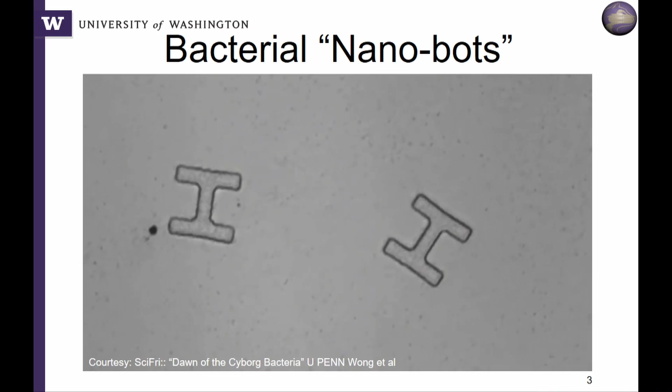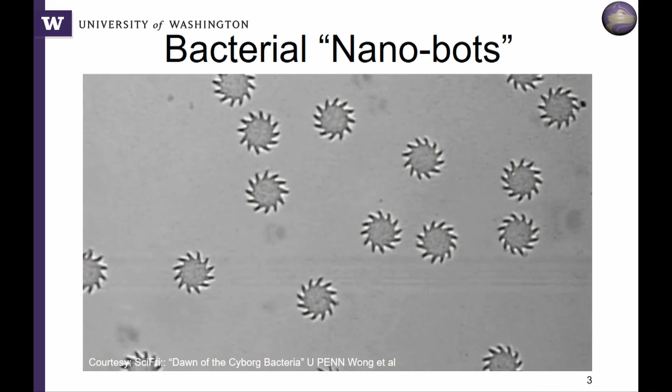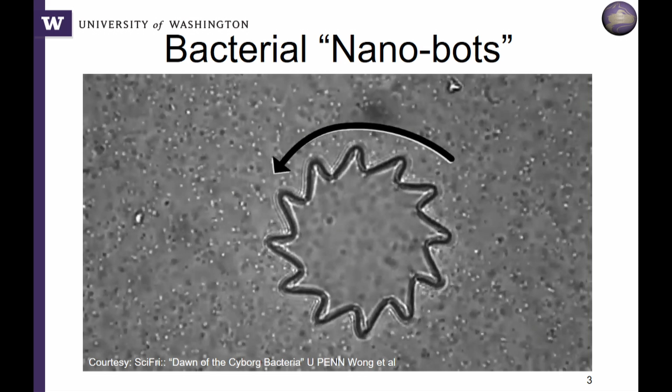We've also had a promise of some nanites or microbots. And in this case, the closest I could find is swarming bacteria. And these swarming bacteria right now are moving these photolithographically defined polymers. And this is work coming out of the University of Pennsylvania, where they're able to program or control or provide stimuli to these swarming bacteria to help motorize these nano devices. So that's about as close as we get to nanites today.

But it's a good theme for this evening because what I'm going to be really focusing on is the fact that we're seeing an integration of bio devices, bio interfaces, and traditional electronics. And I really think that's a theme that will continue to grow as time evolves.

So one of the challenges I have as a nanotechnology director is a lot of people will ask, what do you do? They come up to me and they're like, so what do you do? And I say, well, I'm director of a nanofabrication lab, and I usually get a blank stare if they're not in my field. And the answer is really complex because nanotechnology is a wide range of different technologies. Nanofabrication, of course, is my background, so traditional IC manufacturing or integrated circuits, advanced packaging, a lot of material science that goes into that.

My talk will be mainly focused on that, but we also delve into molecular biology, so understanding cell functions, components of cells, how they integrate and work. So we'll have some talks that will be covering that.

Surface science really is the analysis of what happens between two phases, whether it's physical or chemical. So monitoring atomic impurities on the surface, looking at AFMs, so atomic force microscopy, looking at surface roughness at the atomic scale. That's that type of research.

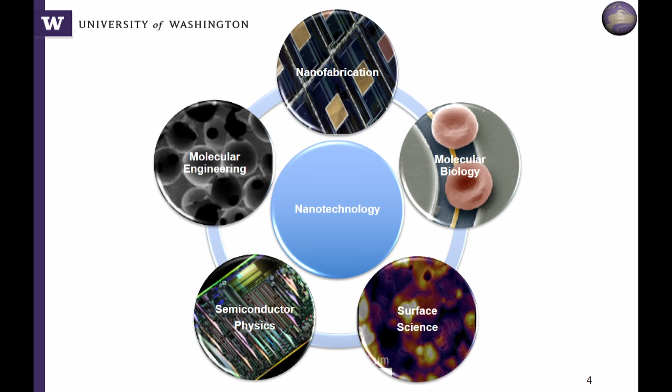Semiconductor physics, things like traditional control of conductivity, photonics, electrophotonic interactions, quantum physics. So these are areas of study that are in the state of the art of the work that we do. And then molecular engineering, where we're actually designing designer molecules to improve materials, improve surface science, to mimic biology.

So all these are really nanoscale, so something between 1 nanometer or sub-nanometer up to 100 nanometers really is the definition of nanotechnology, and either observing that material or manipulating it for some purpose. So that's what we're going to be focusing on. We'll be bridging between those different technologies tonight.

So I'm going to step back and kind of look at what is the technical revolution that's next. Historically, in the last few decades, we've had a major revolution per decade. So in the 80s, we had a PC revolution. The mainframes got onto people's desktops, people embraced it, and it fundamentally changed the way we work.

The internet revolution, of course, in the 1990s, we started connecting at a much higher level, and it revolutionized and changed the way people interact, the way communications and information is assimilated and also communicated. And then, of course, the mobile revolution in the 2000s, where we now ended up with these devices where we have that connectivity. Now, none of them actually replaced each other, right?

So these technical revolutions, if you look at what a technological revolution is, the formal definition says that it's a new set of technology that replaces a former set of technology. And I have to say with the PC, with these information technology revolutions, they really build on each other. And so they're more evolutionary versus revolutionary, but they do fundamentally change how we work.

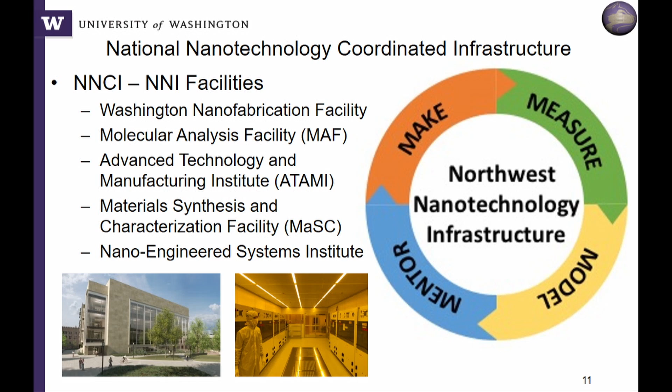Okay, part of our methodology, I'm obviously part of the MAKE group, but our mantra is to make, measure, model, and then also mentor. And so part of the workshop here, we have several of our students in the audience, and that's part of our mentorship, is to work on developing new engineers and technicians that work in the nanosciences so that the local workforce has a pool to draw from when they need those folks.

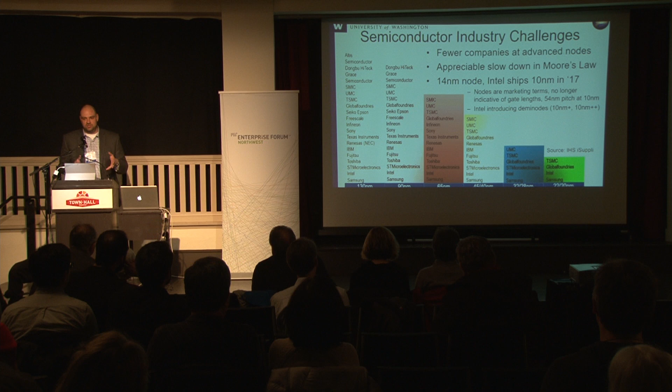Okay, diving into where we are as an industry. So the semiconductor industry has been facing some challenges lately. We have fewer and fewer companies that are at the advanced technology nodes. Right now, state of the art in production is 14 nanometer devices, and we're calling it a 14 nanometer node.

And just as a sidebar, the marketing guys have jumped onto these nodes, and the nodes no longer have a resemblance to the actual physicality of what's happening on the chip. So back in the old days, when I started in this industry, it was 97. I'm dating myself, but I was right out of high school, so I'm not ancient yet. But basically, back then, the node meant what the size of our minimum gate length was. So it was the size of a transistor gate.

And when the marketing guys took over, they just got onto these nodes based on how small they could actually print a feature, whether it had any semblance to what's happening on the transistor or not. And so it really doesn't mean the same thing. So if Samsung says they're shipping 10 nanometer, which is what they're claiming, they're going to get 10 nanometer chips out this quarter, and Intel's saying they're going to get 10 nanometer chips out in 2017, doesn't really mean that your gate length is 10 nanometers. In fact, the transistor pitch is still somewhere around the 50 nanometer mark, 54 nanometers.

So that's point number one I want to make, is even though they're saying that, on this chart it kind of peters out at 20 nanometers, they're not quite apples to apples comparisons between these companies. The other part that I want to point out is it's getting harder and harder to sustain what was called Moore's Law. Moore's Law was not an actual law, but it was more of an observation by Gordon Moore, who was one of the co-founders of Intel, that we'd be doubling the transistor density roughly every year and a half to 2 years. So every 18 to 24 months, we'd double that.

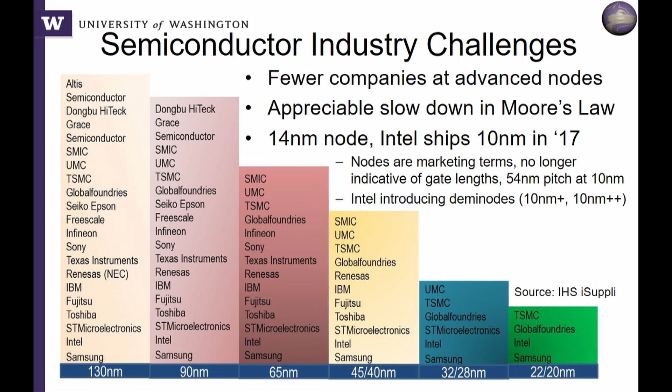But Intel right now is the forefront still. Even though everybody's saying they're shipping 10 nanometer, they're probably the most advanced and the most stable in the process control. They're also looking at diversifying, right? So they're seeing the fact that the demand for chips and processors is starting to wane. So they're now opening their facilities up to foundry work. So they're actually going to be taking designs and be a production for hire, just like Taiwan Semiconductor has been doing.

So the focus is the industry is changing. There are advantages in power consumption, but not really in speed at that size. The transistor density is definitely a factor there. And as we get more parallel processing on chip, that's still an advantage that those forefront leaders are carrying.

Intel's kind of given up the fact that they're going to pursue the next node. So 10 nanometers, like I said, this year. The next node is 7 nanometer, but they're going to be introducing these demi nodes where they're going to try to extend the functionality and better performance without really shrinking the transistors any further. So they're introducing 10 nanometer plus and 10 nanometer plus plus. And again, I think it's more of a marketing thing. So the reality is it's getting a little sparse in the forefront.

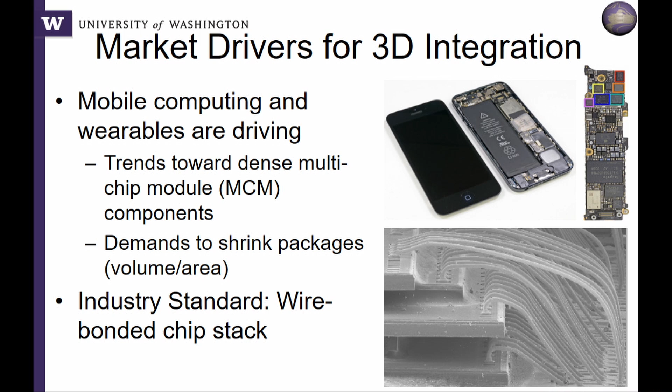And it works really well in mobile computing, but it's not enough. We keep adding the functionality. We add more chips to that chipset. And so we've done things like now embed the chips. We've consumed the front and back of the circuit board. And so we've run out of real estate on that main board in your phone. And so now we're looking at embedded chips and passive devices in the inside of the printed circuit board.

Now, you're going to put your highest reliability chips in the inside of the board because once you sandwich that together, you can't rework it. So if your chips on the inside are bad, you have to throw the whole module away, and that's a huge waste. So that's one of the downsides to having this approach.

The other one is you're severely limited on the inputs and outputs because you're still fanning everything out. So you're pretty restricted in what you can place on top and below that chip. You can't do things like have high heat producing chips inside that sandwich because it'll start to buckle the materials and cause delaminations and other failures.

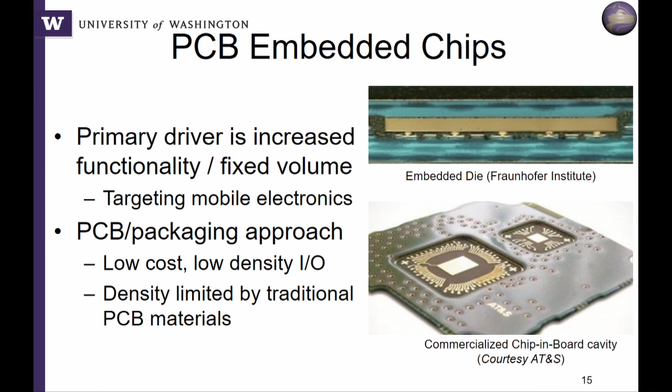Well, we won't talk about engineered failure because if anybody has a cell phone that makes it to 3 or 4 years, it's a feat of engineering now. We used to shoot for 10-year life, and then we decided to do away with that because it was costing us business, right? But anyway, this is what you'll see in state-of-the-art cell phones right now.

And this has been hugely successful in the memory market. So if you have flash, you've seen your flash capacity keep going up, right? You're now getting 64 gigabit flashes. So we're able to get a huge amount of density out of memory stacks for a couple reasons. One is all the memory guys got together and they came up with a standard.

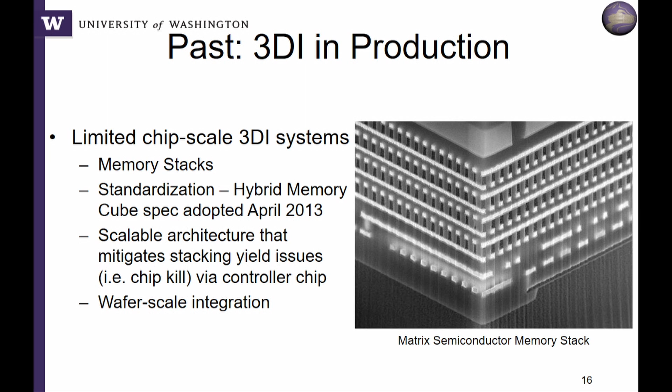I know that seems crazy or seems normal for certain industries, but in our industry, the team dynamics aren't there, right? Different companies don't really play well together. It's highly competitive. But the memory producers got together and actually standardized an interface, and they actually have cross-compatibility. So they helped each other out because they found that they had a healthy market segment there and they could all play in that swimming pool together and do well.

So that was one of the things that enabled the 3D stacking of memory that we haven't seen elsewhere in the industry. The other part of it is it's a scalable architecture. So we can have all these different layers of chips, and if I have a bad layer, all I have to do is kill one of those layers. I can just blow a fuse out and program the controller chip to ignore the bad layers. So I can produce and bin with different chips.

So if I have 2 bad layers, then it's only maybe a 16 gigabit chip that I can ship and sell. But if I get all the layers, maybe I can get a 64 gig chip. And so they're able to economize and receive profits off of things that are maybe even just functional partially. So that's a key advantage when you have a common infrastructure.

The other part is they can just do a wafer scale integration. So they stack all these wafers up, they bond them together while they're a wafer, and then they drill and put the vias in, or the vertical interconnects, at the end. And that's hugely cost effective, okay?

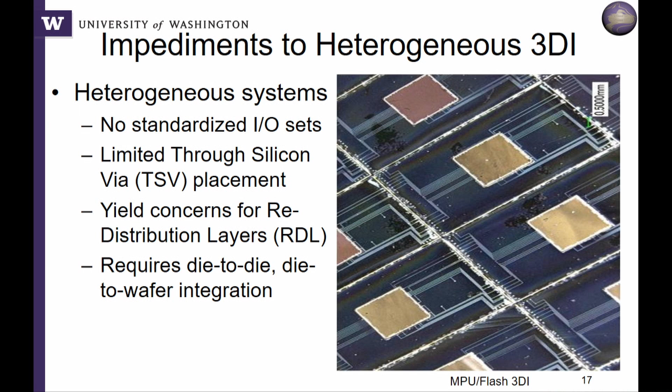The other reason it's slow to market is the process and materials challenges that we've had with these through silicon vias. So a via is a metal interconnect between two layers, and it's just a plug of metal that's a wire that's going up and down, okay? So the challenges in there is that you have to do really thick lithography, so you're limited on what you can resolve. You have to do a process called deep reactive ion etching, where you're actually boring a hole down into the silicon itself.

In fact, when I was talking to Jimmy before, they were using a laser to do some surface analysis. We were trying to do laser drilling, and that had like huge amounts of slag. So we had to develop new etch techniques in order to get a hole through a chip without having a big plume or something that we had to clean up on the surface.

You then have to isolate that hole from the substrate from the metal. So if you have a metal plug going through a piece of silicon, again, silicon is a semiconductor, so there is a propensity for that metal to migrate into that silicon, and then you can start shorting to each other. So if you have two wires next to each other, there's a potential for them to start shorting out through that substrate to each other, or even just having crosstalk using high-frequency communications. So one of the limitations there is we need to put some kind of isolation material.

So one way that we make really good insulators is by heating our samples up to about 1200 degrees, introducing a little bit of water vapor, and then silicon forms a really great native oxide, and we can diffuse some of that oxygen in to create really high quality insulators. The problem is when you're doing 3D electronics, you already have CMOS circuits there, you already have metals on those chips. And so they can't handle 1200 degrees because you'll melt all the metal lines that you just paid a lot of money to get.

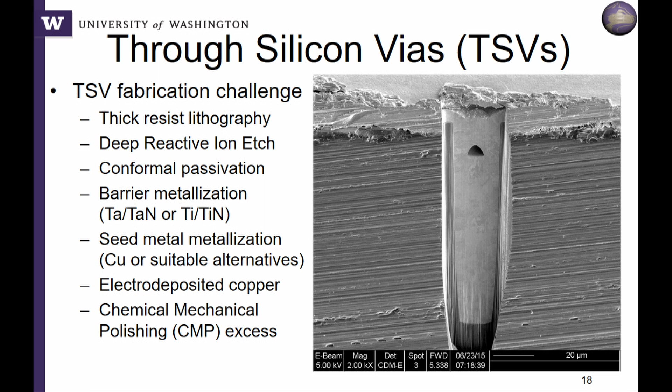After we do all that and we get through plating, which is the easy step, we then have to take the excess material off, and we use a chemical mechanical polish to cap those. And then after that, we do the post-processing where we distribute out those signals. So you can see it's a very complicated thing to do just one aspect of a 3D stack.

So because of its complexity, people have gone to something called 2.5D. And this is where we want to get the performance of having 3D circuits, but we're willing to sacrifice a little bit of that performance for ease of manufacturing. And so the example I have here is some work that we did with IBM when they were IBM. They're now Global Foundries in that lab.

But basically, we had a quad FPGA, so we had 4 FPGAs that all needed to talk to each other, and one of them was a master control chip. And we needed really high frequency communications between those chips. So we were able to produce a carrier using silicon technology. So we used silicon, we created all the wires between those chips on top of that silicon using traditional techniques.

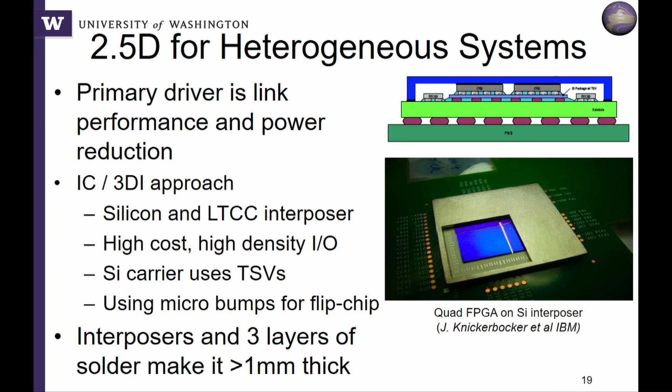And then we took that module and put it on a co-fired ceramic interposer, and we were able to get a supercomputing type functionality out of that. The problem with it is it was extremely costly. It was still substantially thick. It was well over 1 millimeter thick, and it still required quite a bit of complex processing in order to make the stack up. The thickness was one of the issues we had, and going back to, again, our mobile computing applications for mobile devices, that's a real fundamental problem.

So I have a cartoon mock-up of just a slice of one of those 2.5D systems. So we had these TSVs still going through a carrier substrate. We had electronic components, both memories and ASICs, or in this case the FPGA, sitting on that common carrier. And then we had these passive components. And if you look at the scale of the devices, the passive components, that's an 01005, which is the smallest surface mount component that's available commercially still today.

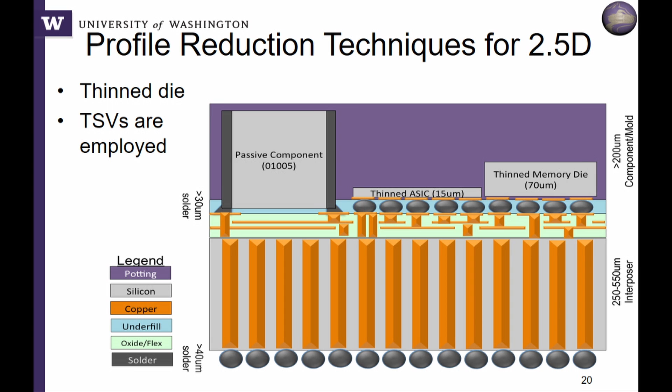So you can see that the chips are not really the issue. The fact that we have passives embedded on this device increased the thickness substantially, and the fact that we're using a full thickness silicon carrier adds about a 0.5 millimeter thickness. So we can thin those down. Our industry is getting really good at thinning components, so the chips themselves are thin now, somewhere between 70 and 150 microns, but we were proposing to also thin the carrier itself.

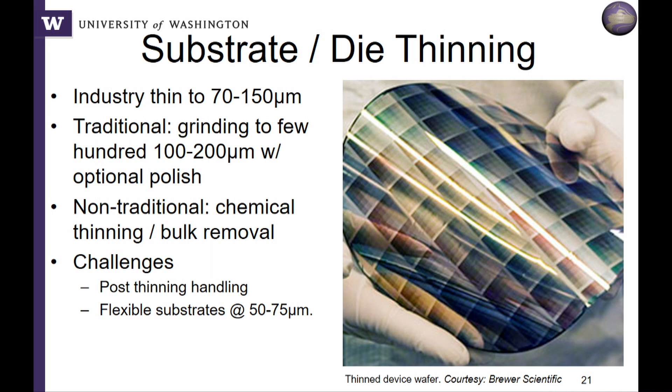And so we're able to take a substantial portion, or about 0.5 millimeter of that thickness, by removing the handle completely and just using the metal and the dielectric that we put on top of the wafer as the interconnect between the chips. So we're able to get things down to sub 50 microns or so. In fact, we've done things as low as just about 15 microns as far as the interconnect goes.

And in this case, you lose the rigidity of that system, so you have to count on this traditional epoxy overlay to become the rigid substrate. So it's quite a challenge to get an epoxy that has a similar coefficient of thermal expansion to silicon to match and not compress and cause contortion.

In fact, our first few attempts at this, we spent 6 months doing this. We got our samples done. Everything looked good. We put our stencil solder balls on top of our sample, so the bottom of the chip there in that picture is the last step. We stuck it in our traditional reflow oven. We heated up that plastic substrate. It warped, and all our solder balls ran all over and shorted and bridged, and we lost 6 months of research.

So, just one oversight on our end cost us substantially and dearly. So mitigating stress, and that's, again, where the folks that are able to start manipulating the molecules and working at advanced polymers and helping us get things that are closely matched, that's where these convergences of technologies really come into play.

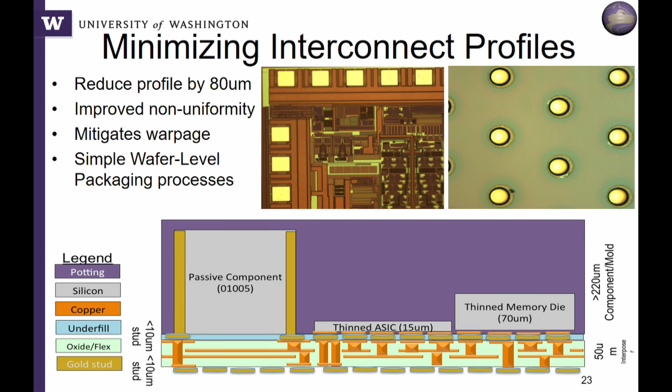The key component here is still our passive devices are dominating the bulk thickness of this device, and that was a severe limiting factor. So we started getting into embedded passives. Okay, so can we make passive devices that are part of our substrates or that are very thin? And so we were able to reduce the resistors using traditional nickel chrome or silicon chrome thin film resistors. We were able to build these very novel inductor loops to create transformers on chip. But we were still really having a hard time building really high value capacitors.

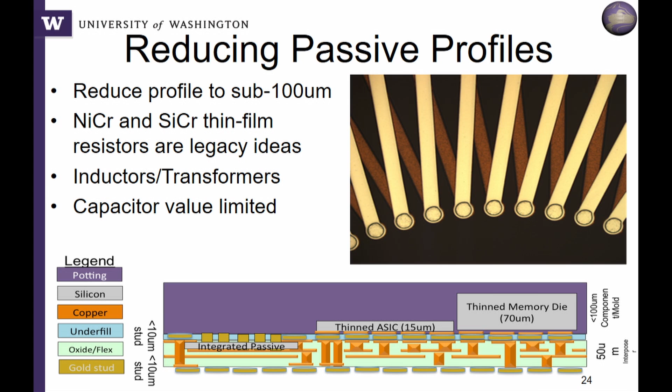So that's where we started looking outside the box, getting away from the organic or the inorganic materials and looking towards organic systems. So we started looking at, can we interface and get biology onto the chip and start leveraging the fact that we can manipulate some of these biological systems and get them to do things like form a battery or capacitor. And so we started working with, in this case, tobacco mosaic virus. So we have a virus that has a nice tubular shape, and we can biofunctionalize one end of it and create a binding affinity to a metallic binding site.

And so we can self-assemble these little viruses, and you can see here these are collecting on the surface here, and they have a nice long cigar-shaped kind of structure to them. And if we take our traditional fabrication techniques, we can make a bunch of pillars and then functionalize those and then get those viruses on there, and so we can get these huge surface area enhancements. And then we take things like our atomic layer deposition and we can coat those viruses. So you can see here this virus is the core of this shell. It serves nothing functional other than being a scaffolding to build on, okay? So it has no function.

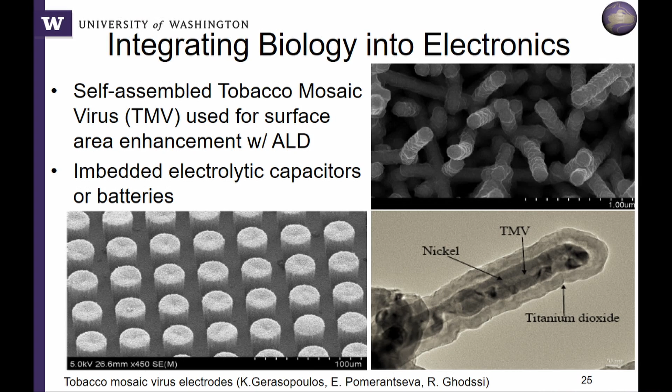We put a titanium dioxide coating, we then put a nickel coating, and then we can put another titanium dioxide, and that forms our dielectric barrier. We can then introduce an electrolytic solution, and we can form either a high-value electrolytic capacitor, or we can take another set of those electrodes and create a battery structure with two dissimilar metals. So we're able to get now the high density and functionality that we need. We're also able to address things like different power levels on a chip, so we can actually create these micro batteries on chip. So it's a way to enhance that area and also integrate new materials, in this case something that we borrowed from the biological community.

Present efforts in this field come back to that pushing the edge of technology. So not everybody can afford a 10 nanometer fab. So one of the things that DARPA is currently proposing and taking proposals on is what they call CHIPS. It's a Common Heterogeneous Integration Intellectual Property Reuse Strategy Program. And only DARPA could come up with an acronym to fit CHIPS.

But basically what they're saying is let's build little chiplets at that high technology node. Let's leverage that 10 nanometer technology that Intel has spent literally billions of dollars developing, and let's create small functional blocks. And so instead of having these custom ICs that take 18 months to design, then we go and fab them, and it takes half a year to a year to get those chips back, and then we find out that we want to do another redesign, and they have to buy $10 million more of masks, which is very problematic for something like the defense industry that only needs 10,000 chips, right?

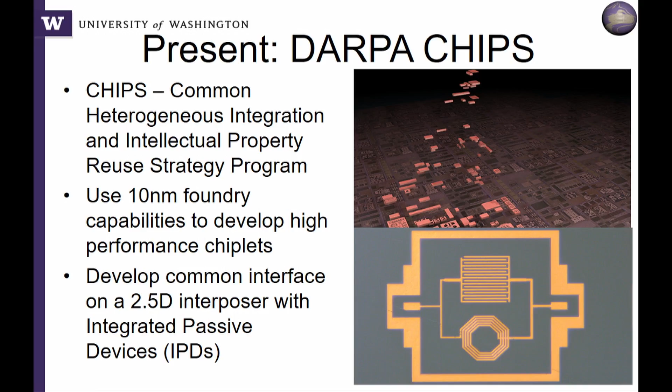So the way that they're looking at it is, hey, let's take that technology, let's use these little functional blocks, let's use ALUs or arithmetic logical units, or let's use your small memory cells, and let's build these little chiplets, these small parts or subchips, and then use a common interface like that 2.5D technology to marry all those chiplets together. And that way we can create custom engineered systems with high throughput and low cost, but still leverage that advanced technology that's been pioneered.

And so that's where we're seeing the convergence of this industry going, is leveraging that technology. We're also seeing more and more IPDs, so integrated passive devices, come to market as the frequencies go up. So as we're looking at 5G as the next cell phone node, the values of those passive devices that are used for like cell phone filters, and that's what you see here is just an LC filter that we're able to work in the 25, 30 gig range.

Those are ways that we can now start getting these passive devices that are on chip to actually make sense, and they're actually functional at the target frequencies we want. So we're seeing that all kind of converge at the same time. Now, it's not a slam dunk. The one difficulty of integrating all these little chiplets is that we need better precision in our placement technology.

So when you look at a chiplet, right now, state-of-the-art pick-and-place tools where they actually pick a component up and place it down mechanically, you can do about half micron, or 500 nanometers alignment accuracy. And if you're targeting smaller and smaller interconnect, because you don't want to waste that huge amount of volume with a bunch of vertical connections, we really need to do better than that.

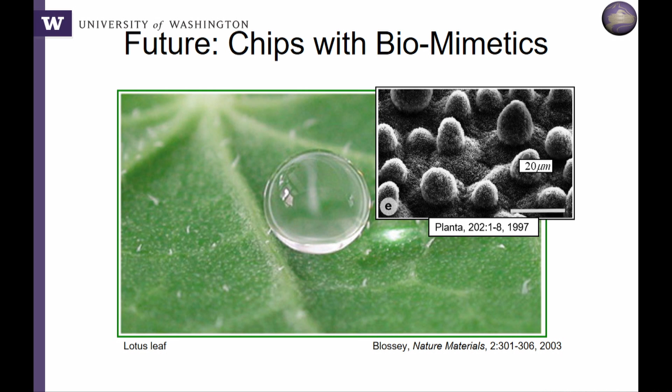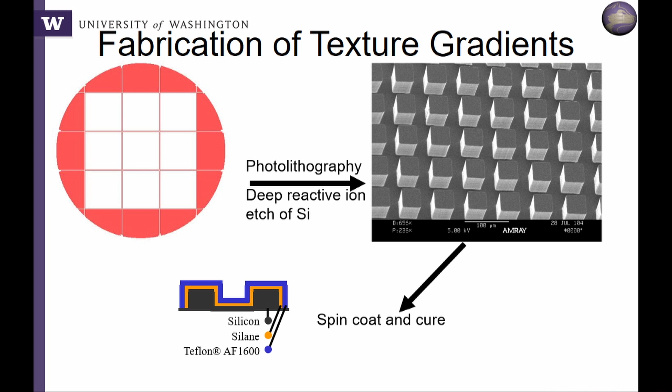And so what we're able to do is start mimicking that biology. We take our traditional fabrication techniques, we can create that kind of topography and create super hydrophobic surfaces. And if we put in things like gradients in those surfaces, we can actually manipulate the way that droplet forms. Well, so what good is that? Okay, we mimicked a lotus leaf. Well, this is some work that's coming out of my boss's lab over at the university for self-cleaning surfaces.

So we're using a water droplet there to clean the surface, and these are little sand particles that are being swept up. So we're just vibrating. Imagine using your cell phone, the piezo that's in there that vibrates your cell phone to let you know you're getting a text message, using that same function to clean the surface of your device.

And if you want to have an automatic self-cleaning surface, you can do things like maybe make it get cold, right? Put a cold plate on there so it condenses a water droplet on there, and then just manipulate that water droplet to kind of go over the surface. And so every night when you go to plug in your cell phone, your screen cleans itself. So maybe not super practical today, but that's the kind of area that we see our industry trending.

So very evolutionary, not quite revolutionary, but still those incremental improvements.

So I'm going to end just with acknowledging, the work was supported partially by the National Science Foundation, highlighting some of the work of Karl Böhringer at the University of Washington, Dan Ratner, who's doing a lot of our biosensing using photonics, and then Reza Ghodssi, who I collaborated with to do the tobacco mosaic virus work.

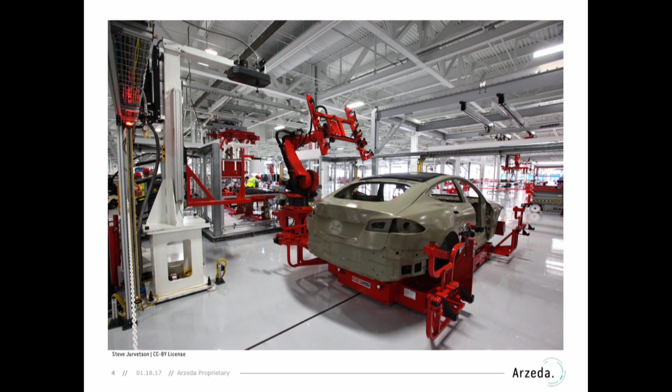So likewise, when people think of factories, this is the kind of thing we think about. And so this is a photo of the Tesla factory down in Northern California, and so what is it? It's robots, and it's high-speed assembly lines, and so things are being put together with extreme precision and speed, and so analogously, when our brains then start thinking about things reduced down to nanoscale, what is it again? It's these really tiny, cool robots, right?

It's nanotechnology, sometimes called nanites, in the popular writing or the science fiction writing, and it's these incredible things which can self-replicate themselves, which can build things, maybe build an entire human, and maybe replicate that pot of Earl Grey tea that Mike was talking about earlier. So that's also a really hard problem. And so people are working on it, and I think we've seen some really incredible advances over the recent years. But you've got a lot of problems to think about there, right?

How are you going to encode the command and control logic down at that level? What's the power source going to be? How are you going to make these things communicate? And what are the advanced behaviors actually going to be?

But what I'd like to put forth tonight is kind of analogous to the VR observation, which is that there is an alternate implementation of this, which is actually available today, has been available for quite some time, and that is the biological cell. And so the cell itself is quite an incredible chemical molecular nanofactory already, highly evolved, highly optimized for sustaining life.

And just to give you a rough perspective on this, I'm about 1.7 meters. Cells typically are 1,000,000 times smaller than me, anywhere from 1 to 30 micrometers. And then the actors, or the robots that are actually doing all the work inside the cell, are then 1,000 times smaller than that. So we're truly at the nanoscale.

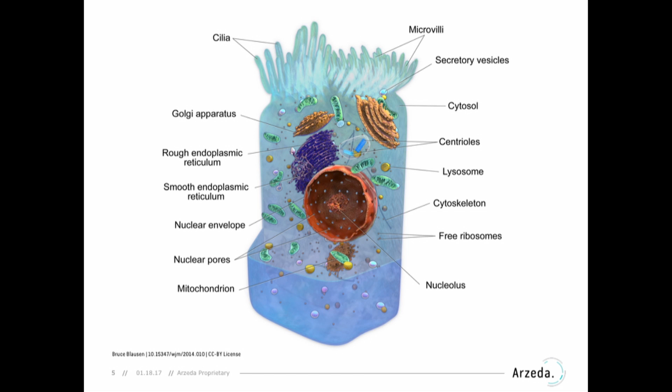So your 37.2 trillion cells, which is the most recent accurate estimate, I guess, as well as the 30 to 40 trillion bacterial cells which are living in you and on you, as well as every single other cell on this planet at the moment, every second, is engaged in this set of life-sustaining chemical transformations called metabolism.

And so you're basically making all sorts of molecules to be able to sustain life. And so now that we know all about this, the question is, can we actually use this framework and then tap into it from an engineering standpoint to actually make the molecules that we want to make?

So just for purposes of illustration, I'm going to zoom in a little bit closer to this map to let you see a little bit better maybe what it looks like. Oh. Do you guys see that at all? Oh, I'm sorry. Maybe the next slide will show up better. I didn't notice that.

Right, so we know a lot about metabolism, and so I'm going to zoom into a center section called the citric acid cycle. Does that show up at all? Okay, that's a little bit better. You're not able to see everything, but hopefully I can talk through it. So this is known as the citric acid cycle.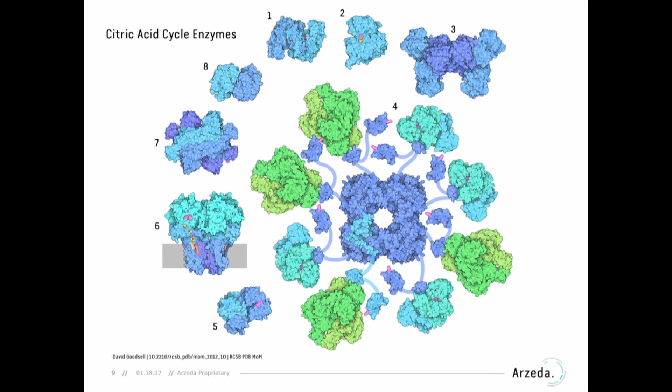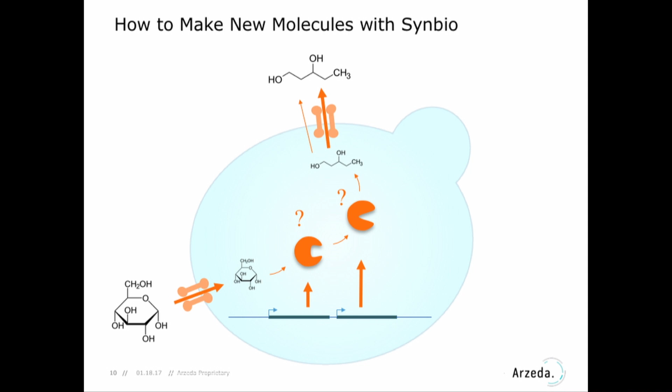And so through a lot of science and hard work, we now know something about these enzymes, and we know that we have the possibility of engineering them. So the 2 components that we need to make new molecules with synthetic biology: the first are the routes, how do we get from A to B? And the second is, how do we actually get and engineer the actors, these enzymes, which will actually make these chemical transformations.

The thing about this is that most man-made products are still derived from oil, right? So like the lacquer on this wood desk, all the chairs you're sitting on that are plastic, right? It's all made from oil, and so this is not such a good thing. And so from a sustainability standpoint and a planetary standpoint, we'd like to move away from this.

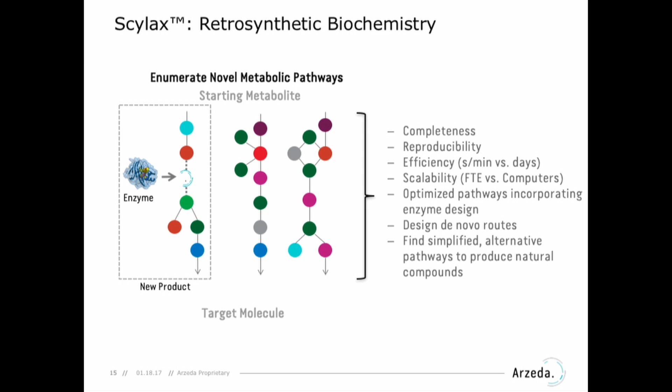So we can run this set of complicated calculations, and what we get out at the end is something like this. Basically, what we have here is a subset of the possible paths for a proof of concept we did for an amino acid called methionine. This is a $1 billion market currently, and it's primarily made for various reasons chemically as opposed to biologically, industrially, I mean.

So basically what you see here is you get lots of different kinds of routes. And the total number of routes that we get out for any particular problem can be hundreds of pathways all the way up to millions of pathways. And so we need a way of actually sorting down the particular routes that we want to use. And so what we do is we apply a set of theoretical and computational filters to find the nicest routes, essentially, by various different factors, and we'll select one of them.

And so then we will take this and we will move it downstream into 2 parts, computational protein design and engineering, as well as the wet lab. And at the end of the day, if we have good luck and we're good at our engineering, we get a complete novel pathway that goes from a starting molecule to an ending molecule.

And so we've actually recently done this. We were happy to announce one of the showcases of this particular technology applied last November with our DARPA-funded grant. And so we've basically shown that this type of methodology actually does work out.

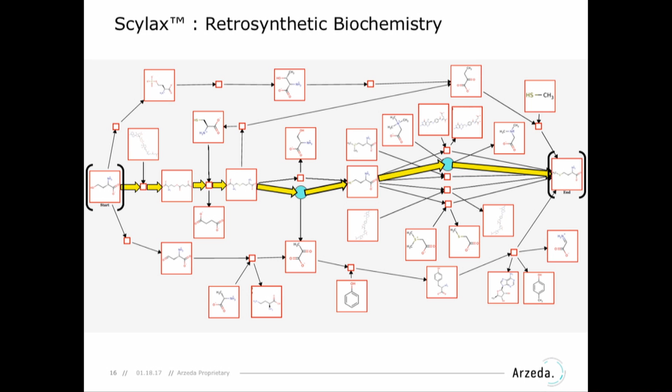So if I go back really fast to this part of the slide again, those blue dots in the middle that I have highlighted for illustration purposes, let's assume that these are enzymes that don't actually exist in nature. So we can't just grab them from some organism, get the DNA and then express the enzyme recombinantly. We actually have to make this enzyme. And so how we do this is we use our computational protein design technology stack, which we call Archytas. And it works as follows.

So what we're actually doing is an in silico screening of protein sequences. And so proteins are linear chains of amino acids. There are 20 different amino acids, and a nice way of thinking about this conceptually is that these are a linear chain of beads on a string. Each bead has one of 20 properties, and this entire thing is then going to fold up into some configuration.

And as far as proteins and enzymes are concerned, geometry is function and function is geometry. So basically, if your protein is able to take the shape that is necessary for the function, then it will have that function. And so what you need to do, right, is figure out the most optimal sequence, the most optimal set of amino acids at each position, which will give you that fold for that functional enzyme or functional protein.

And so the way you do this computationally is you basically have an encoding, which I'll describe a little bit later, and you evaluate the goodness of fit of that sequence on top of that particular fold or that particular conformation you want it to take. That evaluation is done by what's known as a score or an energy function. And what you'd like to do is have the lowest possible score or lowest possible energy, and that will drive that particular protein into folding into that shape.

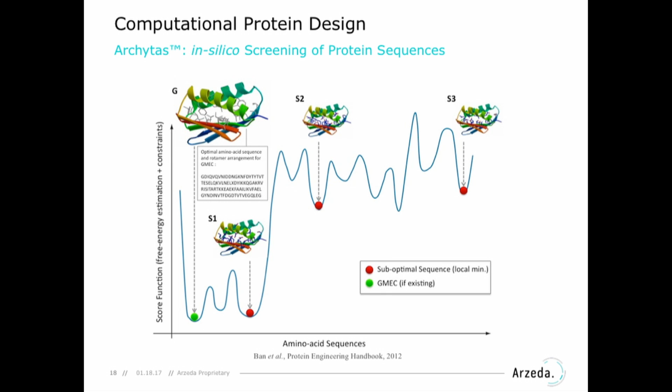This is then basically a search over very high dimensional space, right? So if you have a protein which is 300 amino acids, then what you're looking at is a space of 20 to the 300, which is very, very large.

I can show you this really briefly. This is a movie that'll play. It's the kind of design process that we do. And so let's see, is this playing? Let's play.

So you'll see here initially, this is the protein backbone and then the rainbow color, and this is the stochastic search that's being done over the possible amino acids at the different possible positions. And what you're doing is searching for an amino acid sequence which will stabilize this particular conformation, this particular fold.

The various different motions that you're seeing are different stages of this particular computational protocol, where you have some large movements and some small movements. And so you can see here it goes along for a while, and eventually it will settle at a particular minimum, should be soon, which is here.

And what was done with this particular protein, which is called TOP7, this was work that was done back in the university lab, is that the designed protein's conformation experimentally matches what is actually seen when you visualize or image this particular protein.

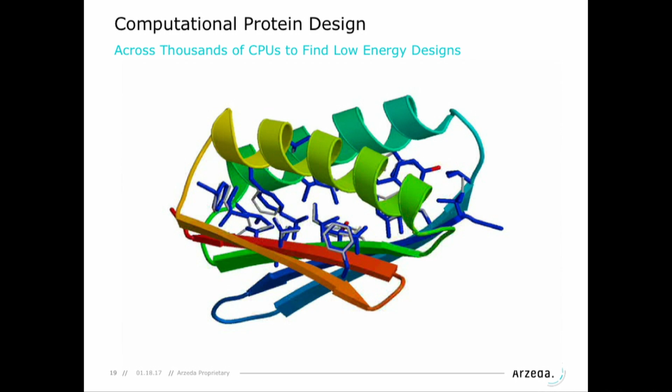And so what we do is we use a machine learning approach, training this function on naturally known structures and naturally known sequences, and do an optimization such that we arrive at a goodness of fit function which is reasonable and well performing for our purposes, which is the design of protein structure. And then we're able to use this to design and build and test new proteins and enzymes.

Here we go. So this particular approach has been industrially validated at Arzeda, so it works quite well under different contexts. We've done both pure enzyme design projects as well as the more molecular manufacturing pathway enzyme design projects. For example, on the enzyme engineering side, we worked with Pioneer Hi-Bred. They're a division of DuPont now, the ag biotech division, and we've designed new crop traits with them successfully.

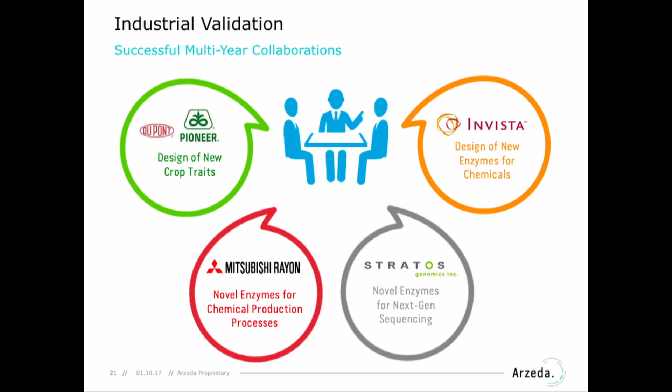I'm about to close. I hope that I've described some of Arzeda's technology today and showed you the fact that molecular nanofactories, molecular manufacturing, really is not a dream. It's something that we've been able to attain via the hard work of, I think, a collection of many people.

We use high throughput computing to really be able to access these types of spaces, and I don't think you could do it in any other way. It's very difficult otherwise. The combinatorics are just too large.

I think I'd like to close with more of a conceptual slide. I was asked by the organizers to predict maybe 10 years outward where things might be. And I feel like a lot of things I say here are probably going to dovetail pretty well with what Michael has talked about earlier. Basically what we're going to see is that some seemingly incremental gains are going to compound and create some revolutionary feats. So things have a way of compounding and sneaking up on you.

And personally, I feel like the primary thing that's going to cause this is really speed and accuracy, really speed. So faster prototyping, faster implementation. And if you take the analogy of what's happened in the IT space with ever faster processors and ever greater amounts of bandwidth, I think you're going to see a similar thing happen for the synthetic biology field.

And I think one of the interesting things that's going to enable is this game of what if. So right now the engineering timelines, even given what we've been able to achieve, are still quite long, right? To be able to prototype and then get out enough sample of the molecule that you're interested in, you're still talking a year or two, maybe more. That's just for one molecule, right?

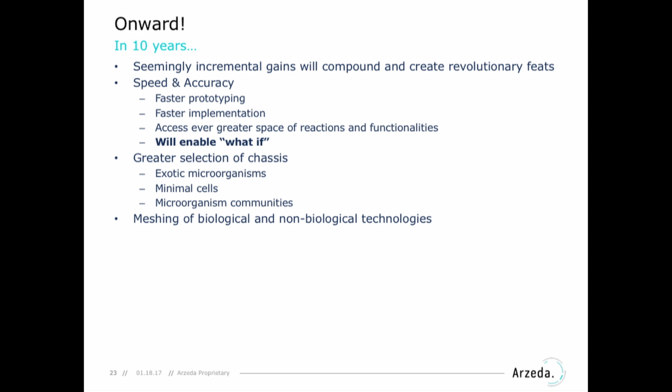We might see some minimal cells. The beginning of this has been reported in the literature, I think, earlier last year. So cells in which you have a very, very basal level of survival, so there's not noise interrupting the kinds of manufacturing that you want to be able to do with your cell. And then we're also probably going to see some microorganism communities.

But the last thing that I think is going to be the most interesting and probably the least predictable, which Michael already touched on, is the meshing of biological and non-biological techniques. And so I think people are going to begin to discover some pretty creative ways to combine what we're doing in the synthetic biology field with other things, maybe biobatteries or something to that effect.

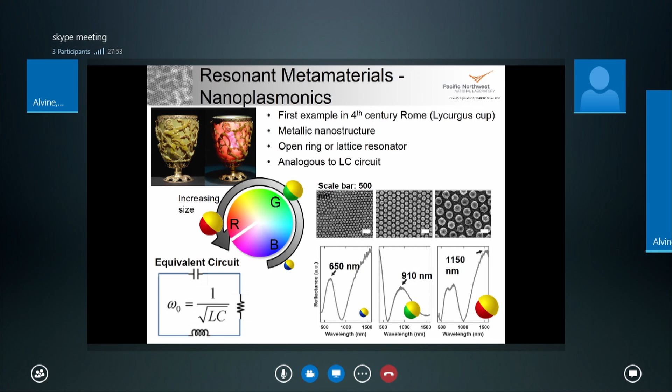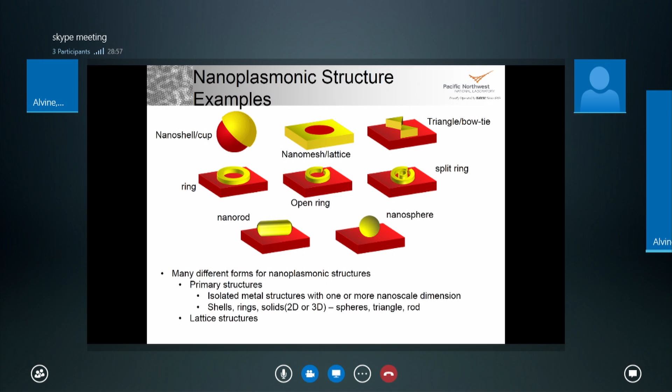So your complexity isn't exactly just limited by your fabrication techniques. In order to make something on the size of a window, manufacturing is extremely challenging. And it's not just the challenge of being able to make these, but you also have to make them in a cost-effective way, especially for something like a window technology where the cost margins really aren't that high in terms of what the market will accept. So you're talking on the order of a few dollars per square foot.

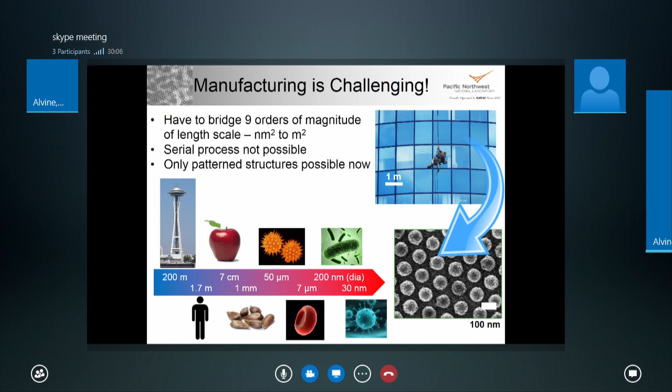And so you have to be able to bridge that gap between something like the Space Needle, which is like 200 meters in height, down to coating it with structures on the order of the size of bacteria or viruses. So you have to make an array of structures where each individual component is about 100 nanometers in diameter. So the challenge is to be able to span those 9 orders of magnitude in terms of manufacturing. So there's obviously some challenges and limitations there. So I'll hopefully give an overview of different fabrication routes and what works and what doesn't work.

So, to go by Feynman, there's plenty of room at the bottom. Well, there's a bunch of other approaches that you can use, this bottom-up approach, to be able to make these nanoplasmonic structures over large areas. The simplest would be to synthesize solid nanoparticles or nanorods, and then one can disperse those in, say, a paint or like that. But that doesn't really give a lot of flexibility in terms of the response. So we take sort of a middle ground, looking at self-assembly processes, taking essentially a disordered structure and creating a patterned structure out of that by the intermolecular forces between the different particles and the capillary forces and things like that.

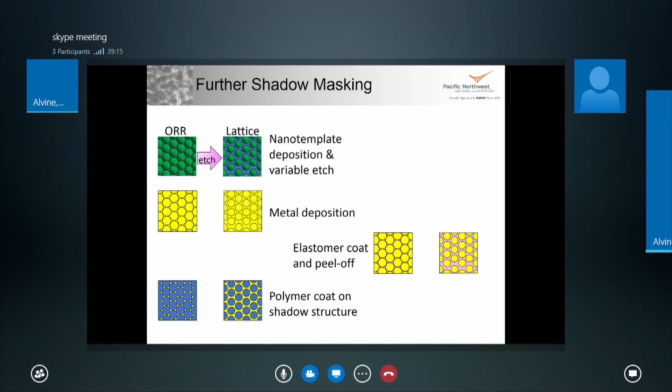We have also done some fabrication with nano-imprint lithography, where we emboss a grating into a structure and then coat with metal from one angle to create these nanocylinders, which I talked about earlier. So nano-imprint does, again, hold a key to making a lot of different, more complex structures.

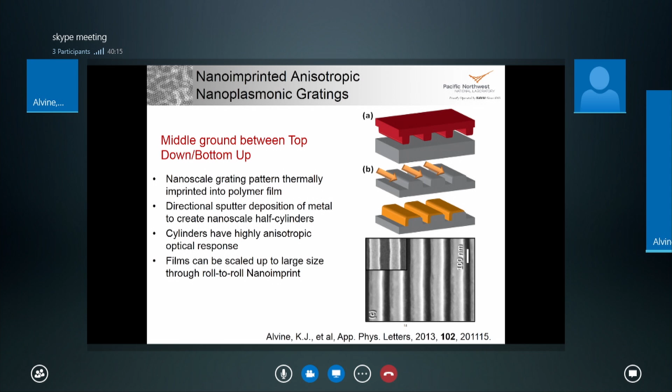The other thing that we're always looking at is, are there ways to make the structures cheaper? Because in order to increase the marketing potential for these structures, one has to lower costs as much as possible. And so we start thinking, is there any way we can go simply to just wet deposition techniques to make these structures, rather than having to go from a wet deposition route to a vacuum deposition route to put on the metal. So what we can do is to make everything with wet deposition by using sinterable metallic nanoparticles.

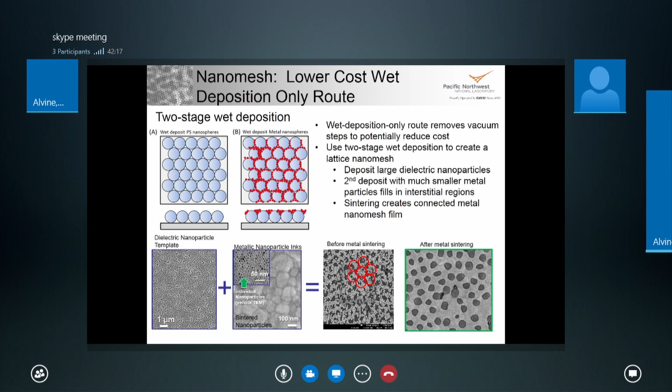So in that way, just using wet deposition, you can create structures that are nanoplasmonic. This is still in the really early stages, and so the film quality isn't that good. But again, you don't have to resort to using a vacuum for this. So this is potentially a lot less expensive than the other techniques, and in large area applications that may be key. We don't have to do everything in the laboratory.

We do a lot of design work, so you can actually determine what the response of these nanoplasmonic structures is going to be, so that you can design things and figure out what structures you need to build. So we can use finite difference time domain modeling. We can figure out what the near field response is in terms of where the resonance is occurring.

That's critical for things like window applications, to know whether the response is in the visible, which typically you don't want, although you could use it for color tinting purposes. But you typically want to have the response be in the near infrared. And so we want to be able to control that so that we get the right spectral properties of the window. So we can do that using numerical modeling to save a lot of research dollars.

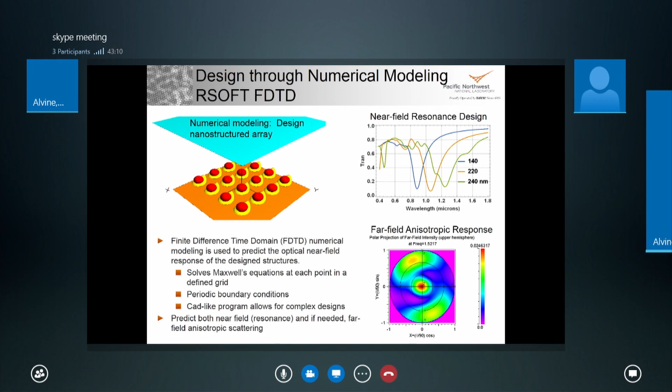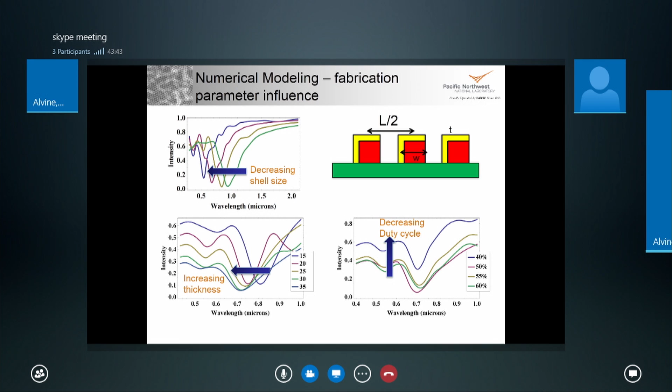So we can also use that to come up with sort of rules of thumb in terms of what happens when you change different parameters in terms of the fabrication, in terms of increasing the thickness of the shell, or decreasing the size, or decreasing the duty cycle. So we can develop these phase space mapping or rules of thumb. So we can figure out generally, if we were to go design a particular structure for a particular application, what our needs are, then we can figure out, okay, generally we need to change this or change that, and so that's a really useful tool.

For example, we can look at a structure that we were building for IR blocking in windows. We needed to block out the IR, so we needed to look at a combination of 3 different nanoshell structures, and we need to know what the combination of those structures looks like in terms of the infrared reflection. And so we could use numerical modeling to combine them and figure out what that effect would be.

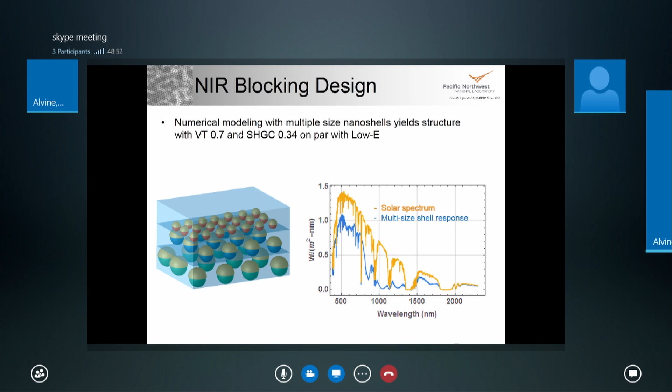The other thing that these spectrally selective systems can do, as I mentioned, is to allow for dynamics. So because the optical response of these is dependent entirely on the geometry and the orientation of the nanoshells, when you disorient the film or essentially randomly orientate the particles, then the projection of the incident light electric field on the particles reduces, and instead of getting infrared reflecting, you get essentially infrared transmission.

So we incorporate essentially a buckling transition or a wrinkling into the film where in the cold state, the film is wrinkled and the shells are all misoriented and infrared light comes in. So you get that beneficial heating from the solar heating into your room to warm it up. But when the window film heats up and so the room is hot, you no longer want that solar heating.

The film has now expanded and is now flat, and so you get this really good, well-oriented film that can then reject the infrared light, and so it can switch reversibly based on the temperature of the window between a buckled film that's allowing infrared light in and the flat film in the hot state that's blocking the light.

And this is an example of one of the films that we made, so it's got pretty good optical transmission as well. So there's some really interesting things you can do with incorporating dynamics into some of these nanoplasmonic films that are spectrally selective.

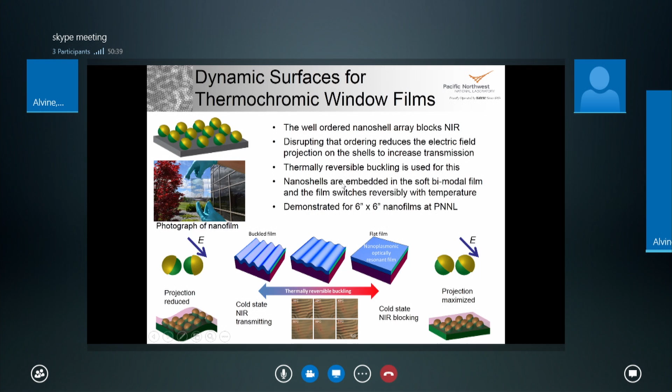Other things that we've been able to do with these structures is to look at using them for sensing. What we were primarily interested in was using them for radiation sensing. So because the nanoshell is essentially a resonance cavity, if you change the properties of the material inside the shell or right next to the shell, if you, for example, have an overlayer of material that's sensitive to radiation, if you damage that material and change its index of refraction, then you can get a shift in that resonance. Essentially, it's like changing the capacitance of a cell, and then you're seeing a shift in the resonance of the LC circuit because you've shifted that capacitance value.

So we were able to look at films that are created with acrylic, essentially very thin acrylic films. You don't see much of a shift in just a thin acrylic film. There is a slight shift there, but you can't see it because it's so slight. But when you incorporate the nanoshells into the film and do the same exact experiment, you get a very dramatic shift in terms of the interference fringes from the film because of essentially the resonant enhancement of the nanoshells.

So this can be used as an optical dosimeter, and that's very important because you're basically looking here only at the reflection of the film. So in a case like Fukushima, you really don't necessarily want to be right up next to the source or the place where you're trying to see how radioactive it is. You can then look at this from a standoff method in cases where the fluence is quite high.

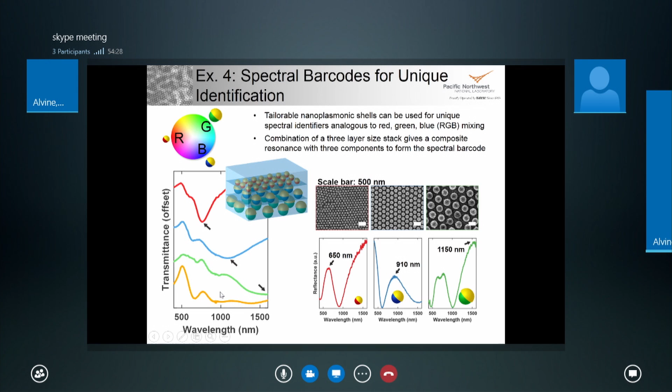So we can also make spectral barcodes out of these by incorporating the addition of multiple resonances. This incorporates 1, 2, and 3 resonances. This is the combined structure. So for unique authentication, or essentially a spectral barcode of things.

I think I will skip the summary here, and I want to talk just for a minute or two about some of the things you can potentially do using imprint lithography. So, I've talked about nanoplasmonic structures up to this point using just self-assembly processes, but I think that long-term nanoimprint lithography could play an important role, but you're still probably going to want to be able to make as much complexity as you can by post-processing rather than necessarily having to incorporate a very complex structure initially.

And so the way you can do that is by looking at the thermal instability of the polymers. This is work that was done at NIST back when I was there about 8 years ago. So there, we figured out essentially nanoscale structures are pretty much unstable because they have all this surface energy that wants to make them flat. So you can see all of these little sharp corners want to go away, and the surface wants to essentially height decay into a flat substrate. And that's exactly what will happen if you let it go.

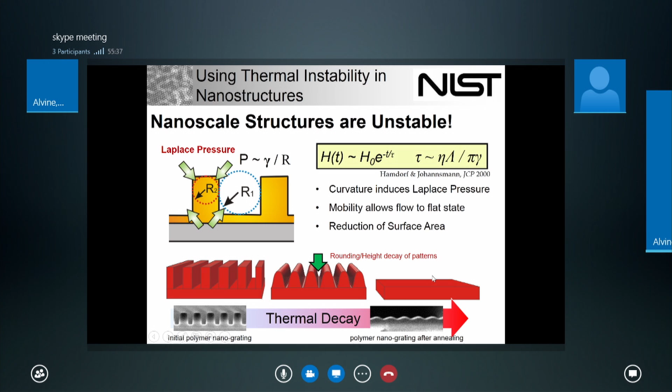When you take a polymeric surface and you heat it near the glass transition point where it can flow, it'll go flat. What's more interesting, other than this sort of slumping behavior, is if you look at threads. So if you take a liquid thread that's traveling along, it will break up into droplets. So, there have been examples in literature where they'll take a series of polymeric threads that are isolated on the surface, and you can break that up into droplets. So that's a way of doing some patterning.

One of the things that we did at NIST was to look at, okay, let's add one more level of complexity. What if we include a residual layer between the polymer threads, which is actually very easy to do, and it's actually easier to do than having no residual layer. So what happens there actually, in some cases, is you get essentially a collective instability. So you'll get lines forming what looks like a sort of a zigzag pattern, or they're all undulating.

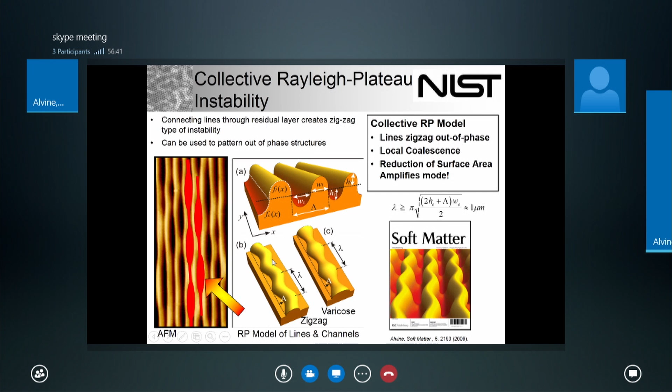And so this is actually just another flavor of the Rayleigh-Plateau instability, where the surface is just trying to decrease its surface area, and so you get this varicose mode and sort of the inverse of the varicose mode, which is the zigzag instability. And so you can use that to pattern the structure, and you can potentially make things that are more complex that can be useful for nanoplasmonics.

And you could further enhance that using chemical patterning. If you add, let's say, a fluorosurfactant to that material, and then let that surface decay, you can create chemical patterning. So you could do the same thing potentially with metallic nanoparticles. And so this is just another way of using sort of de-wetting or thermal instabilities to create more complex patterns from simple structures.

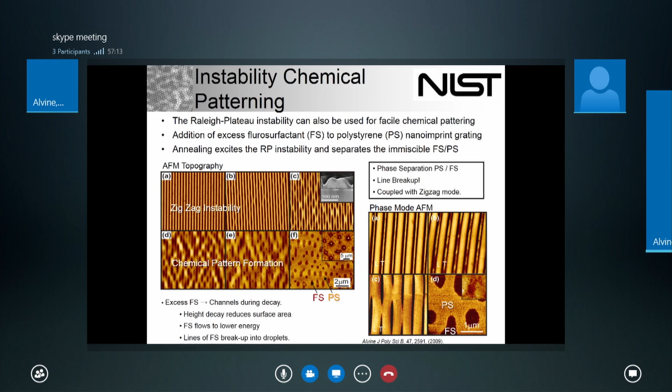So I think I'm just out of time, so I want to wrap it up saying, these materials, a lot of people think of these as cloaking structures, but what we're really focused on is using them for spectral selectivity to be able to control and manipulate light at the nanoscale. But we've got to be able to bridge that 9 order of magnitude gap to be able to create something that's amenable for building a vehicle or even your cell phone screen. So, that's a really serious manufacturing challenge. Cost is definitely a deciding factor in a lot of these, but I think there's a lot of room for potential application there.